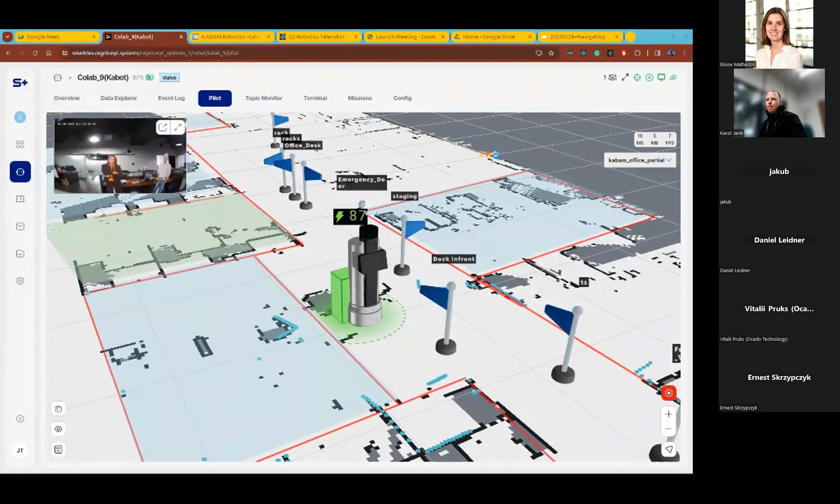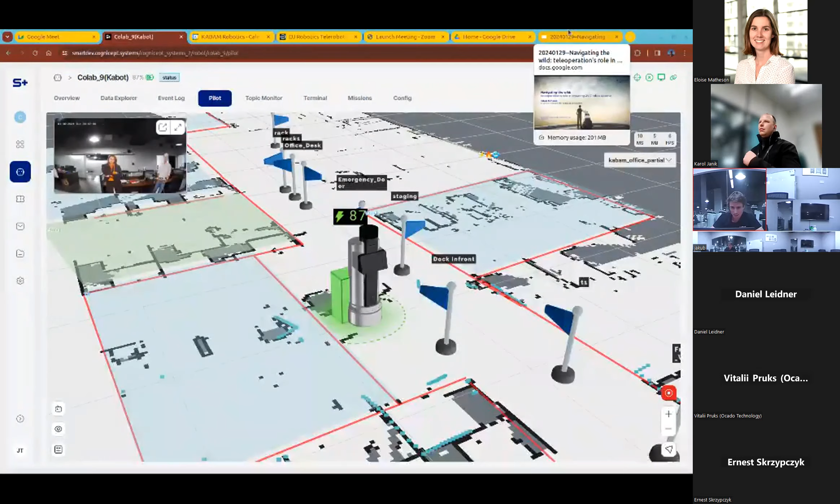Thanks, Karol, for the introduction. Actually, clarification - it's engineering director, so I'm the tech guy in the company. Expect more of a technical presentation, not a sales pitch, although there are some product slides, because I feel I need to introduce what we are building before I can get into the fun part about teleoperation and robot operations.

Sorry about the dizziness. My camera on my laptop is not working, so I'm using the conference camera. I might be rotating a bit. I still feel I should be showing my face, but let me know if you are dizzy - you can turn it off.

I also wanted to make it more fun, so there is a demo as part of this. Karol, please cut me off at 15 minutes in case I overrun or get stuck on anything not important. But as Karol introduced me, my name is Jakub. I'm the engineering director at Kabam Robotics.

Today I'm gonna talk about robot operations. I'm particularly gonna focus on teleoperation and expand on how we actually use teleoperation to keep our robots up and running.

So we are a startup based out of Singapore. We provide cloud robotic solutions, mainly tailored to the security industry, but also facility management industries.

We started building robots 3 years ago and never stopped really. If you've been in Singapore in the past 3 years, you probably interacted with our robots. We have them in some nice sites - some of you might recognize Marina Bay here, there's the airport, some of the parks. This is the Flyer.

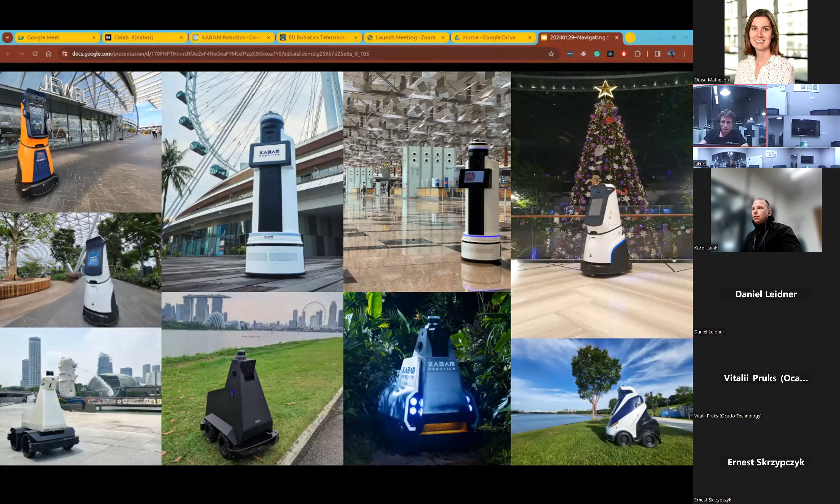Most of our robots are currently in Singapore, but in the past 6 years the team has been focusing on really expanding across the world. So now we have footprint in Australia, in Hong Kong, in Taiwan, in Japan, in the US, which is probably our next major market. And recently we delivered also in Chile.

So that's why I can quote the four continents, but still the majority of the robots are in Singapore. I think this world expansion is also creating some interesting challenges in terms of latency that I may talk about in the presentation.

To introduce a bit more of what we are building - it's both hardware, so we built our security robots, and you can see some of them behind me. Those are our Co-Labs, the indoor security robots. But we also built a cloud robot platform for robot operations and robot management.

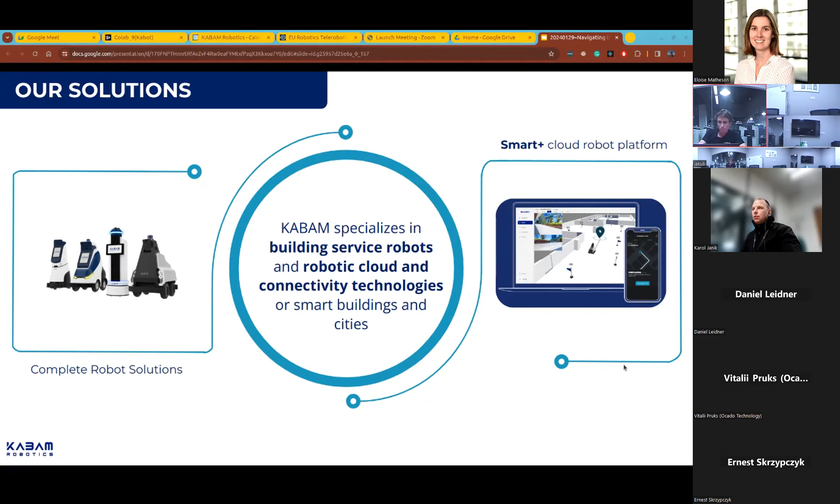I'll just briefly introduce the two robots that we are building. So this is Co-Lab, an indoor security robot for security and concierge features. Typically it would be deployed in places or facilities like shopping malls or hospitals. With that in mind, it was designed more friendly - kids like to jump on it and hug it.

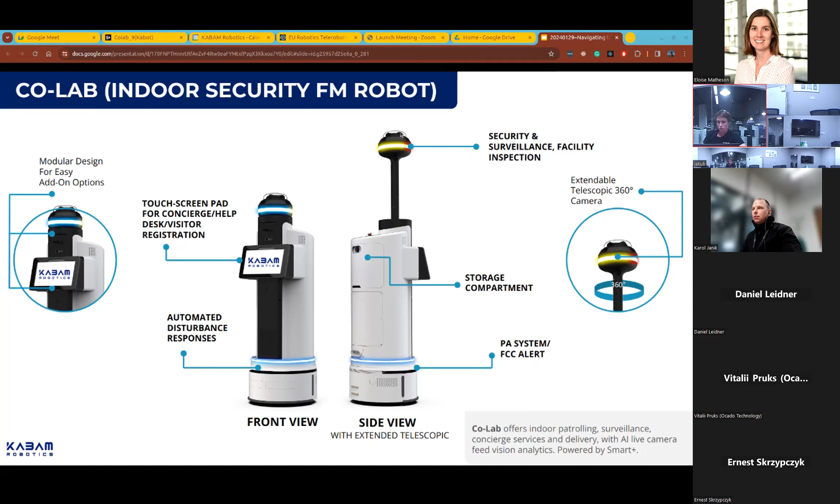We recently also launched Halo. It's our outdoor security plus patrolling robot. It's a skid steer, built to be weatherproof, particularly for Singapore. But recently we've been deploying it in places - Singapore weather is lots of rain, lots of humidity. Recently we've been exposing it also to -10, -20 degrees.

So we are trying to expand the range of where the robot can go. As compared to Co-Lab, the key idea for Halo's design was deterrence. Some of you may pick up, or I hear it often, that this looks a bit like the Tesla truck - I like to say we've been there before Tesla truck with the design. But yeah, it's more edgy and supposed to deter people.

It's deployed in public parks. It's designed to patrol around large facilities like airports, for example.

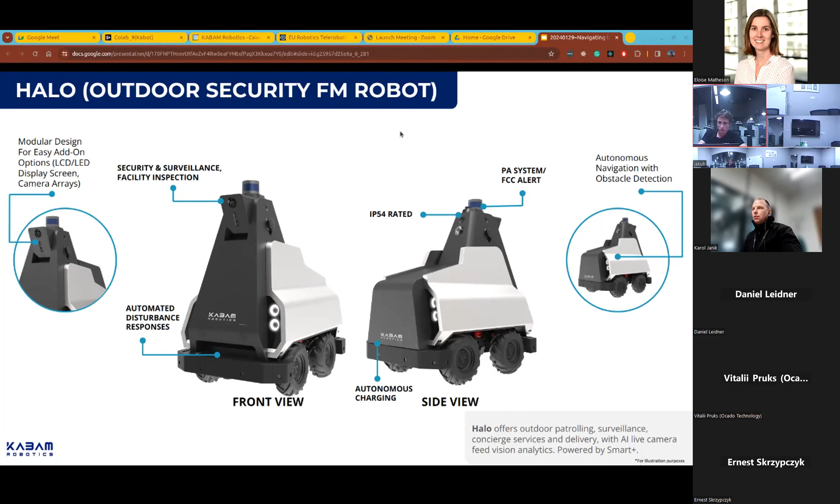And the third product that I will be focusing on the most - this is actually how we started the company. We started building Smart Plus, what at the time was Smart Plus, in 2018, 2019. We were called Cognicept Systems at the time.

And we were running operations for a company called Savioke - some of you may have heard of it. It's one of the Willow Garage companies, one of the original robotics companies. Now they are called Relay Robotics. I think we picked up a lot and learned a lot about robot operations and what needs to be done for them.

And for that, we built this platform. From the beginning, it was really focused on robot operations. It was built to be simple, for any kind of user to just jump in and intuitively use it.

So you don't need to be a trained robotics engineer. Now we also have a mobile app, so the same things you can do with the desktop interface, you can also do with the mobile app.

One of the things we didn't appreciate initially was connecting this platform into existing systems, and this is actually what's really propelling our growth now, with security customers really wanting to integrate our robots with their existing systems.

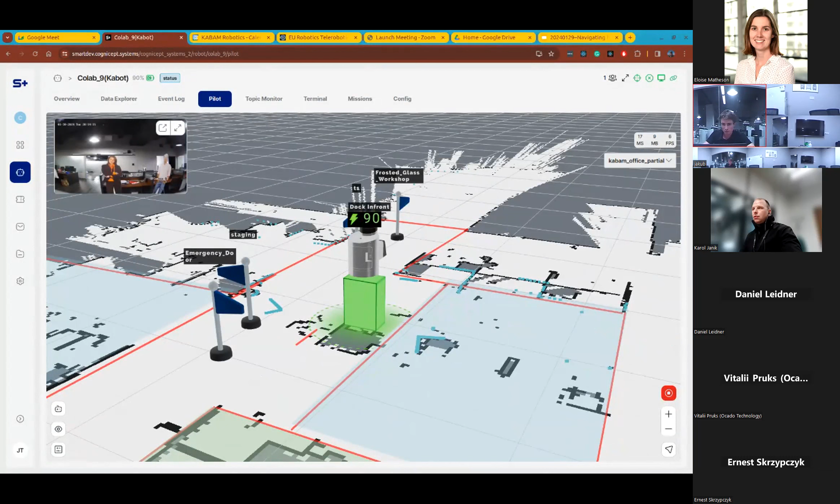If something doesn't work, I'll switch back to the video, as Murphy may not be kind to me. So you are looking at the indoor security robot. Right now I'm in the same room, but really this robot could be across the world. I'll be seeing the same thing, just probably with higher latency.

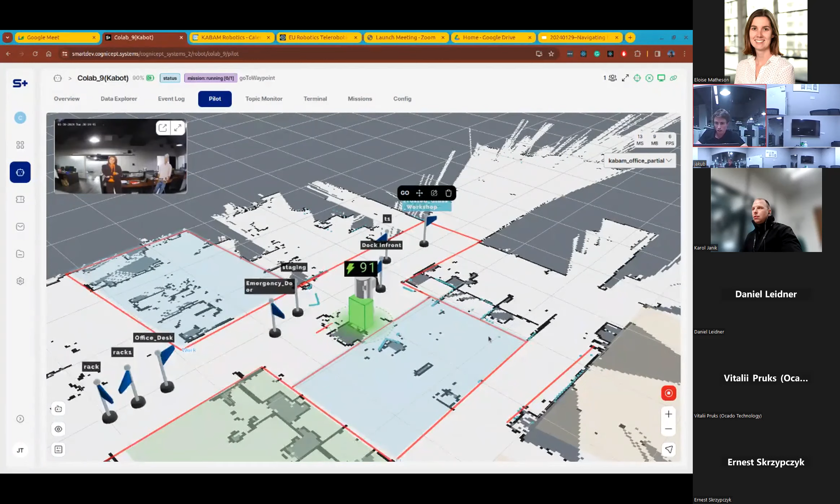I'll send the robot to look at the workshop. So here on the top left, you see the live video stream of what the robot is seeing right now. You see the path plan generated by the navigation system, the point cloud, and the LiDAR map.

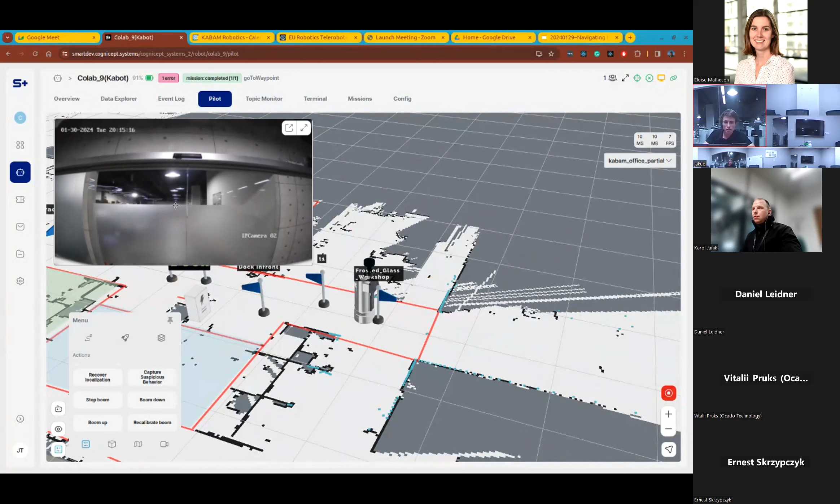As I was showing before, the robot has a boom, so from here I can just boom up. The boom is going up, so I can see what's happening in this other production area. And if I actually increase the resolution...

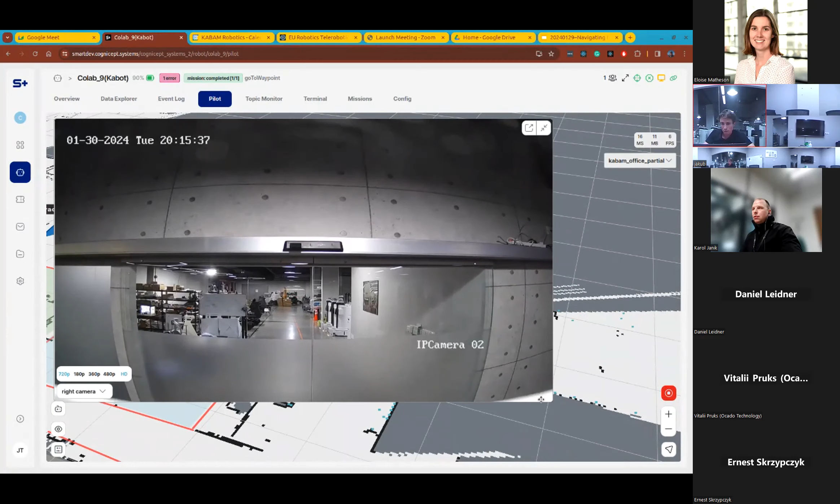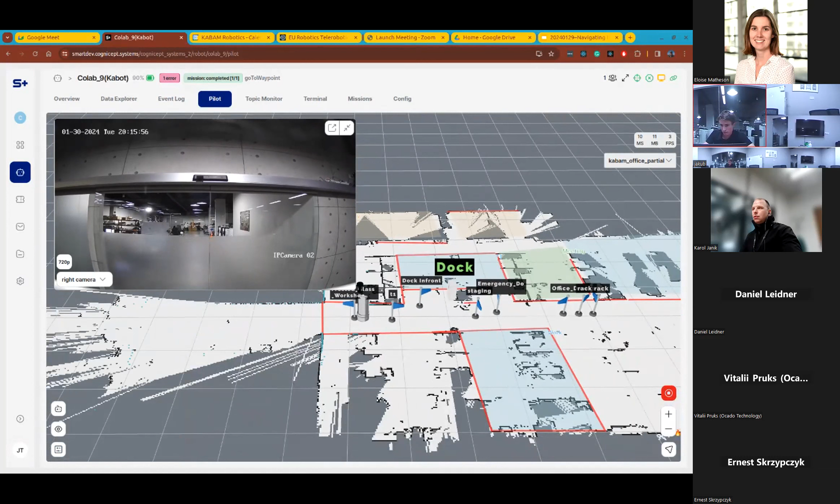So I'll try to send it across the office. Let's say here. Once the boom goes down.

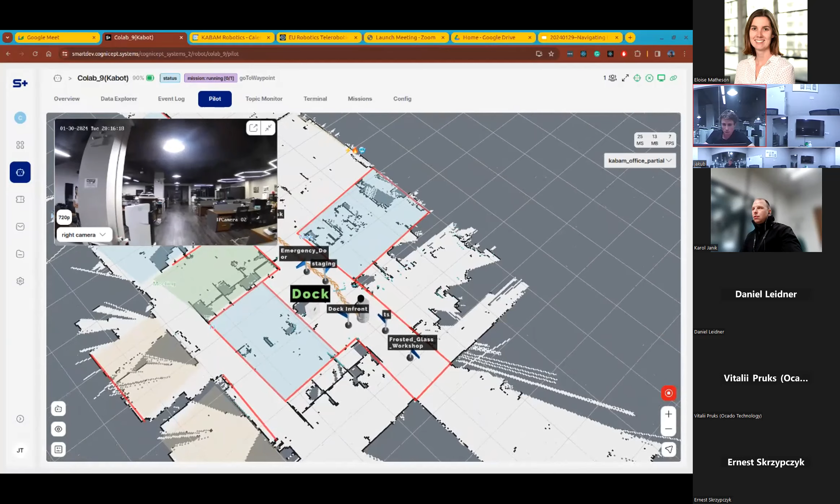So I saw that there's this cardboard box that I can see also here in the LiDAR map. So let's see if I can...

So that's the main thing I actually want to talk about: teleoperation. Let me just take over the navigation system and see whether we can push the cardboard box without doing anything too dangerous.

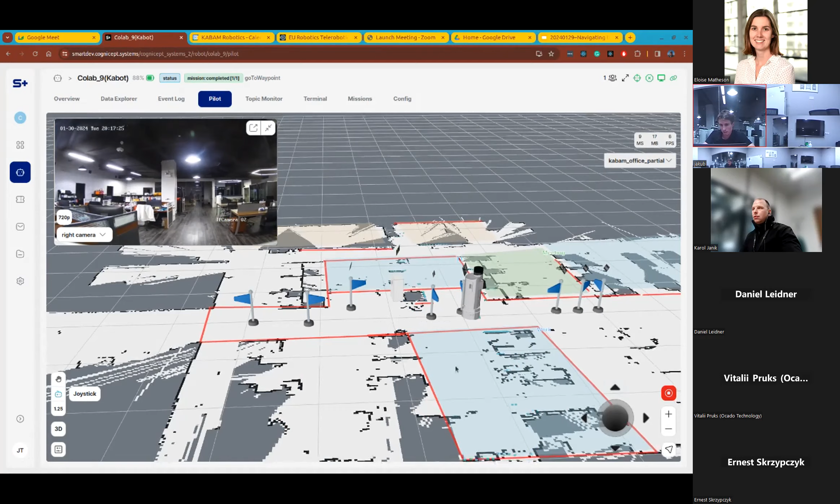I see I didn't do too good a job because the cardboard box is still there. So let's try to push it over. Okay, I think this worked.

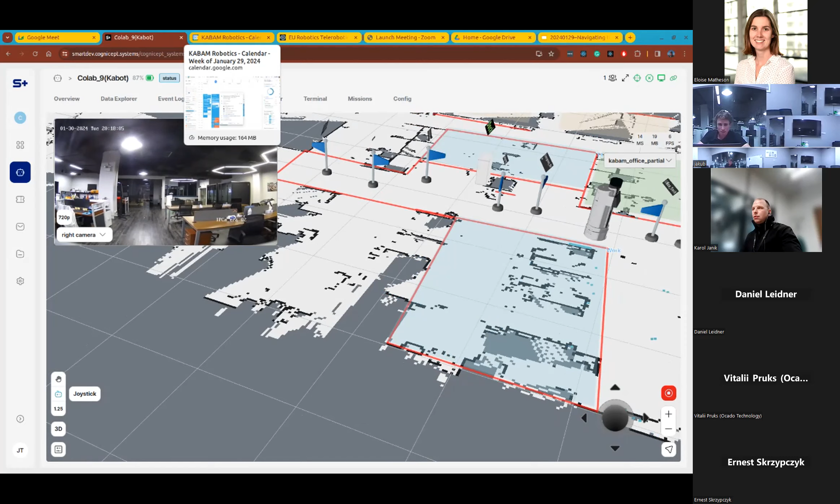Yeah, so now the robot should be free to go really anywhere. So that was a quick demo to show the teleoperation. I typically like to do this before actually diving into the deck, not at the end. Let me just go to the next slide.

In these places, literally anything can happen just because you have humans, and you have really changing conditions all the while. We solve these challenges and risks operationally. This takes a lot of humility for a robotics engineer to admit that your robots and your navigation are not perfect, but I think it was crucial for us to recognize that early on to make this a success, and maybe get ahead with deployments before your navigation system is perfect.

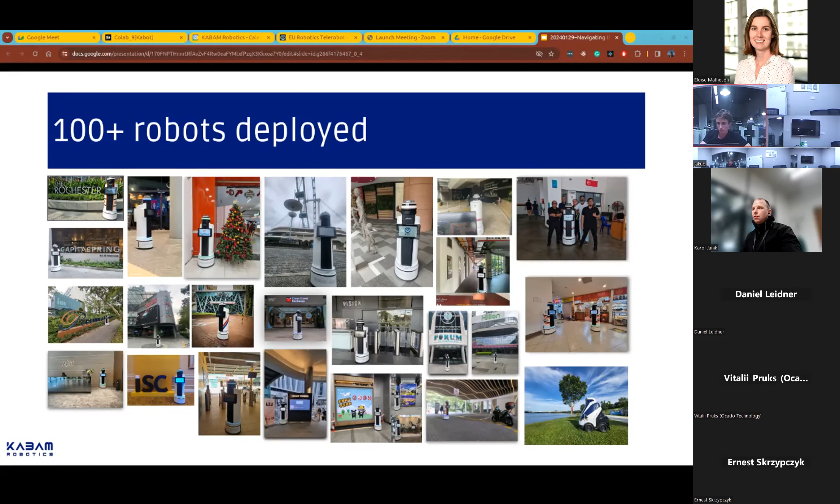Just to show you the kind of scenarios our robots need to tackle, we'll show one deployment. This is our deployment at Bedok Reservoir here in Singapore. We call this robot Oscar.

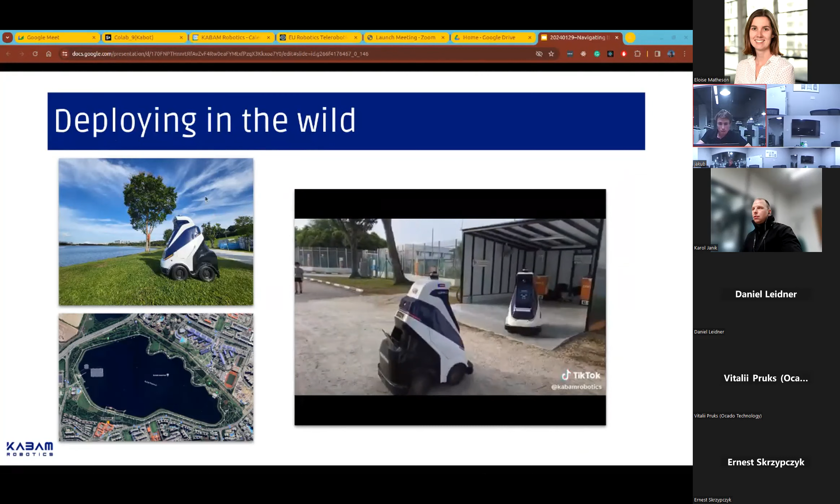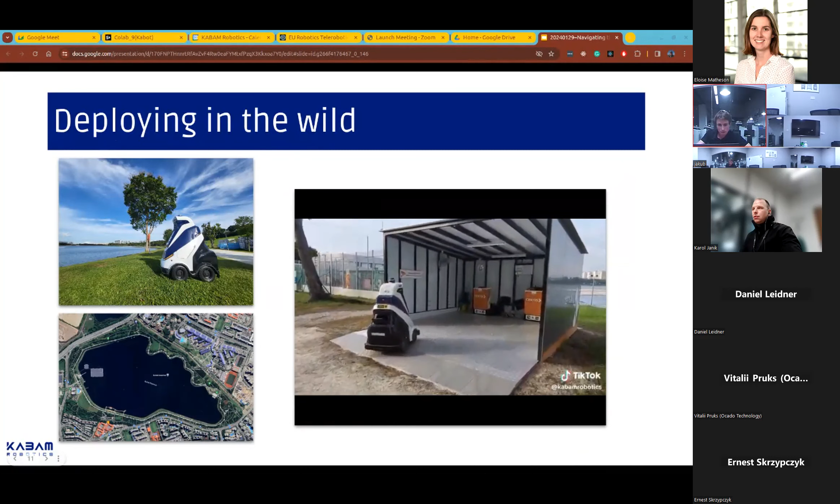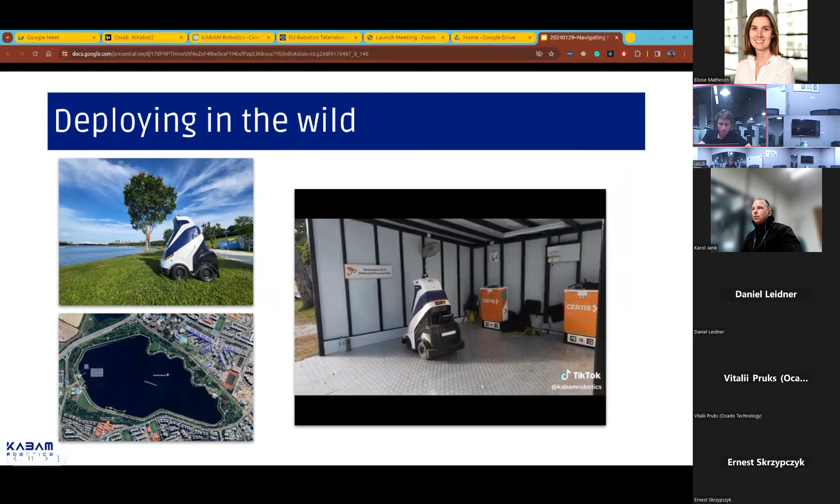We actually have 2 of them here. This is on our TikTok, where they take turns patrolling. The robots have charging stations somewhere here, and they go around this 4-kilometer perimeter to look for things like illegal smoking, illegal fishing, and people who are not supposed to be there at some spot, doing regular patrols every 2 hours instead of a human. Why instead of a human?

Well, humans don't want to walk in this kind of rain, for example, but the robot really doesn't mind, except that sometimes this may pose challenges for the navigation, and we might really encounter some strange edge cases. Normally this environment is really simple, and your navigation system should tackle it easily.

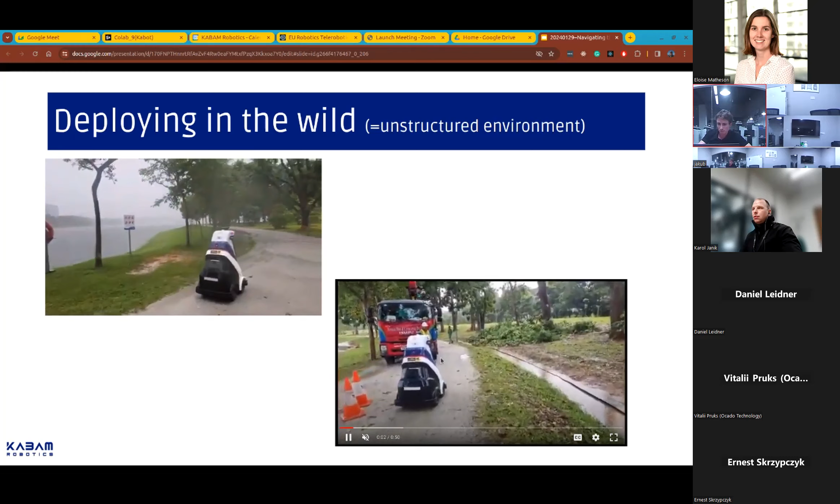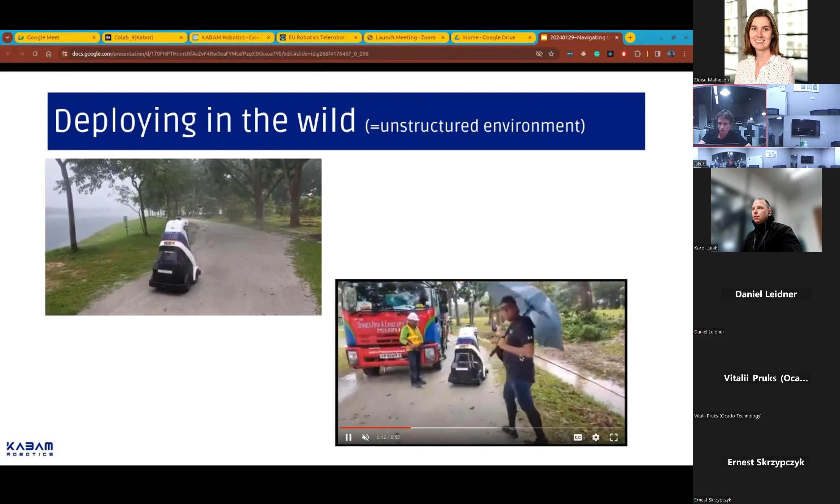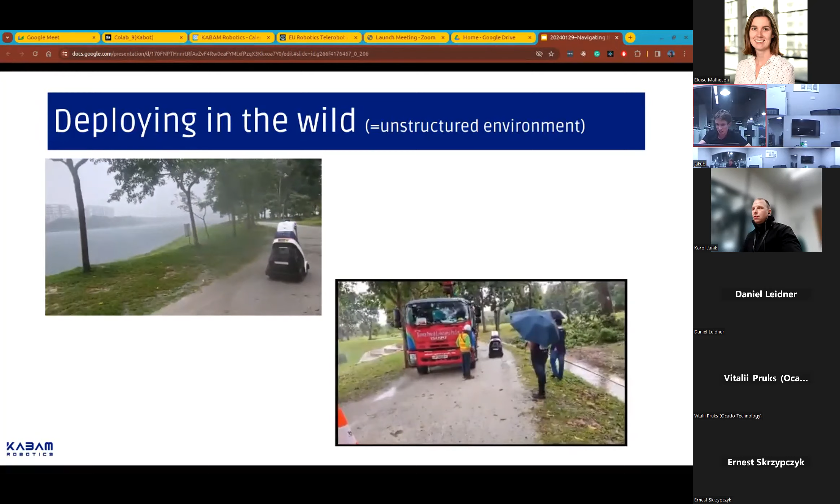But what if there's a situation like this, where there are folks cutting trees, there is rain, there is a ditch full of water on your right side. This is just an example of an edge case that's actually autonomous. People are recording this video because they were surprised the system was able to handle this autonomously.

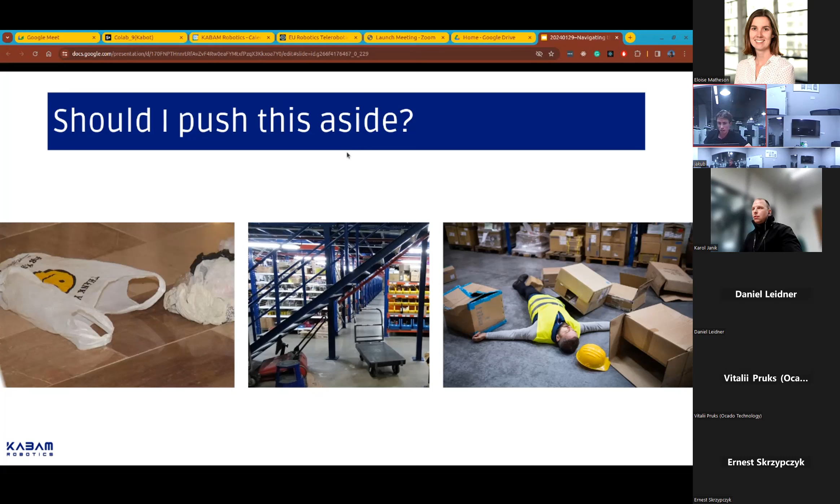Another example from our CEO, he likes to use this one in his deck because he's coming from the commerce space, from warehouses. At what point can the navigation system or the autonomous system decide: should I push this aside, should I run over? So that's what I was trying to show during the demo.

Robot operations is something that took me a while to get on, but once you start running a business, you realize every on-site intervention is very costly. Do you really want to drive 3 hours, which is our average drive in Australia to the sites we deploy, just because of a plastic bag?

For autonomy, really the time to issue resolution is imperative, because that equals robot uptime, and that's what the customers are paying for. So where we use teleop right now, that's all robot operations.

First, during deployment, when we do mapping for the navigation system, since our robots use LiDAR-based navigation, we teleoperate the robot to create the map. Then through the same system, instead of being on-site in the heat or the wind, we can remotely set out waypoints, no-go zones, and update the map just by pushing the robot around with teleoperation.

Second phase, after the initial deployment, where engineers would typically be on site, we have a stabilization phase, where we see lots of issues initially during deployment, and those are fixed. But we still need to somehow help the robot navigate those situations, so things like remapping happen a lot in the stabilization phase—again using teleoperation instead of autonomy.

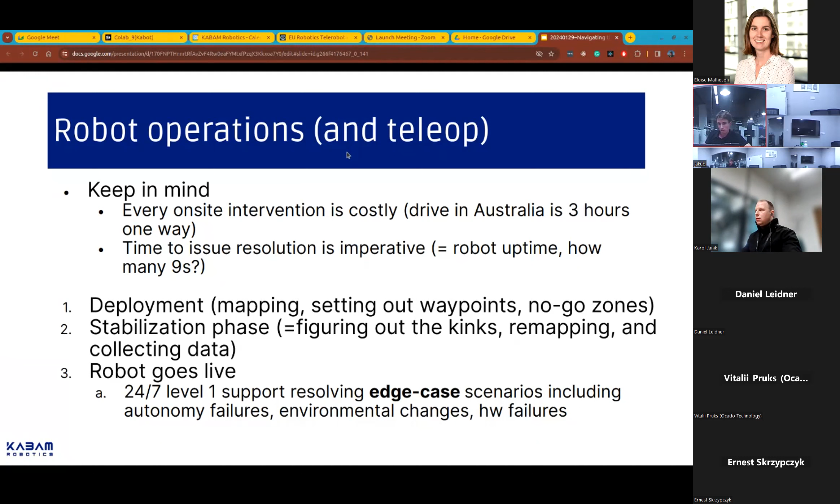And of course, collecting data to improve the navigation system. Then after the robot goes live, we have 24/7 level 1 support that handles these edge cases, autonomy failures, environmental changes, or even hardware failures—if your wheel, if your axle breaks, can your navigation system handle that situation nicely? Meanwhile, a human can probably deal with that kind of situation.

And I know I'm running behind, but what I think was important to realize from the beginning, when we started Cognicept Systems, was how to get teleop scaling, because we cannot have one operator handle one robot. That's of course not scalable.

So I think there were two recognitions in the beginning. One was to build a scalable solution, which for us is a web application. It could be something else, accessible from anywhere—our operators are in India, Singapore, US, and by anyone. So the interface is very simple, very easy to use, easy to train. Training has been a big factor for us, and of course that adds on top of the cost of the robot if the robot is complicated to use.

We also introduced automated incident management, so that one operator can handle multiple robots without having to monitor each robot and what it's doing. It's basically kind of a call center for a robot, which is a bit ironic, where the robot realizes, oh, something is wrong with me. That's our error classification stack, which is, by the way, open source.

You guys can find it—maybe I'll be sharing this deck later. That creates an incident ticket alert for an operator, and then the operator can intervene and handle the situation, or call someone on site to help the robot resolve the situation.

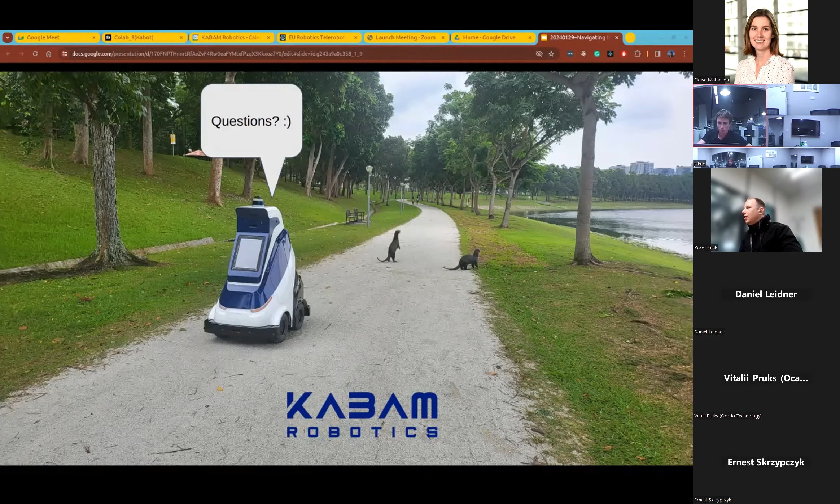So which technique of GPS SLAM harmonizing does your solution use?

Which GPS? I don't understand the term harmonizing, but if you are referring to fusion of the GPS and SLAM, that's probably something I cannot share here in terms of the details on the navigation system, unfortunately.

There's another question from Etienne. Have you implemented your own navigation software, or do you use open source navigation solutions?

It really depends on the platform. So the outdoor navigation is something we are building ourselves, but for example, the indoor navigation is something vendor-based, proprietary, not ROS-based. For the outdoor navigation, we are reusing a lot of open source.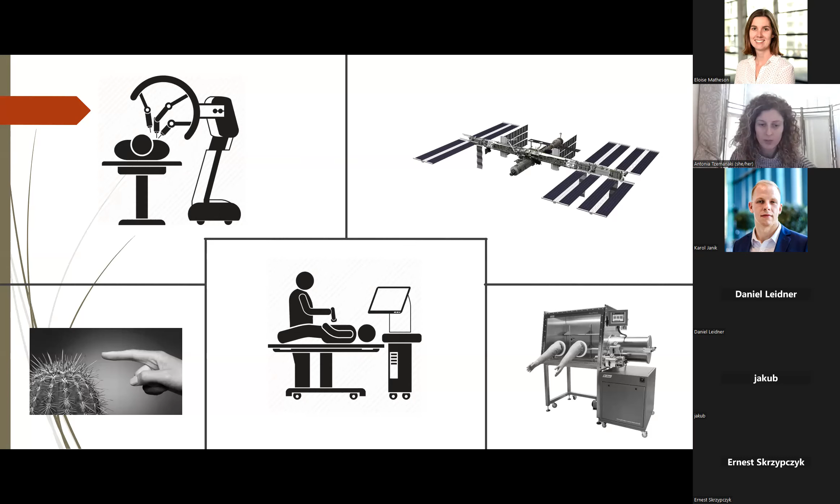And we know this, of course, from our everyday life, since we were babies - playing, touching each other, feeling each other, communicating with our environment, in really high precision activities like surgery, playing the piano, or cooking as well. So I just want to show you a high level overview of some of our projects, starting with some of our surgical projects.

So this is back in 2016, actually quite an old project, but it's a bit of the basis of how we've started developing different things. This was aimed at minimally invasive surgery, and we wanted to revolutionize how minimally invasive surgery is done without needing to use the Da Vinci console and joystick manipulation.

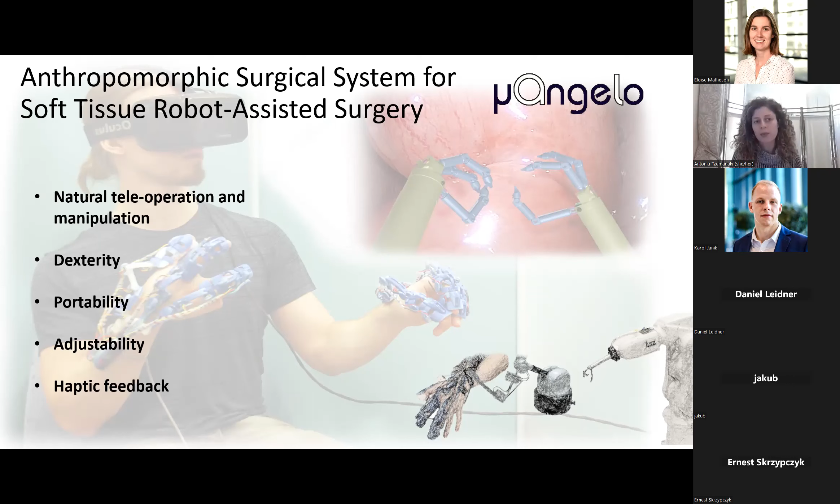We wanted to have a direct, natural teleoperation using your hands as a surgeon, to try to minimize the training time needed on the system, to make it more ergonomic, and generally adapt the system to your hand, not your hand to the system.

So this basically included a hand exoskeleton that can track your hand and all the joints and how it's moving, and then transfer that to a little surgical instrument, of which we had a prototype here. On the left, you can see a 3-finger miniature hand, or instrument, with as many joints as your human hand, so it can behave in the same way.

So you can see the concept in the simulation of how it enters the abdominal cavity, deploys itself, opens, and then is teleoperated directly by the surgeon's hand.

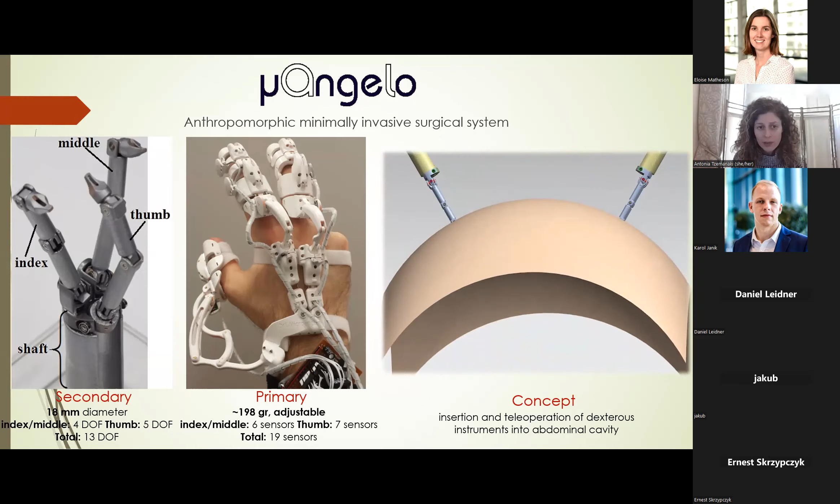We are also now working on soft versions of them without 3D printing, just using soft materials - either fabric, leather, or even silicone - that we can laser cut and make custom made for your hand directly, because all of us have different hand sizes.

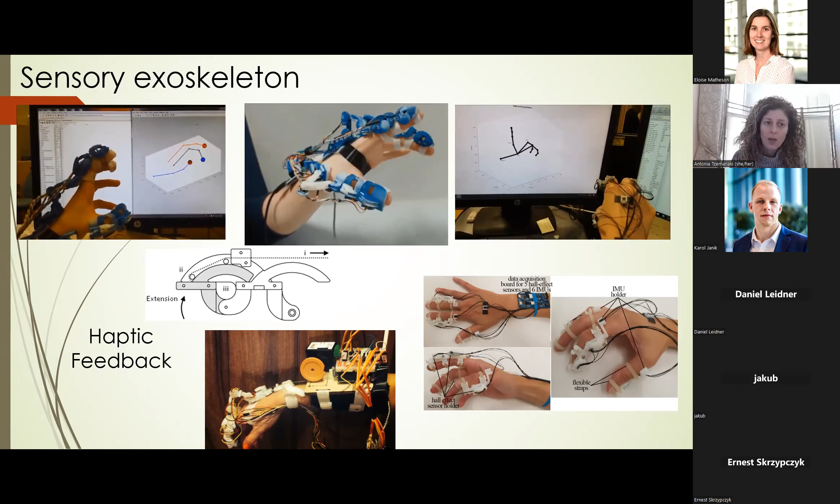So more on the tactile and haptic side of things - this is where we started in 2018, actually. We made this little device, we call it a fingertip haptic device, and it was all about having this little inflatable pillow touching your fingertip, inflating, deflating, simulating different stiffness, and also squeezing your fingertip or releasing it.

With these two modalities, we were able to simulate different hardness of possible nodules when palpating a body, to try, in a teleoperated way, to diagnose someone if they have a lump on their breast or other parts of their body. But of course this has applications in many more areas than just diagnosis.

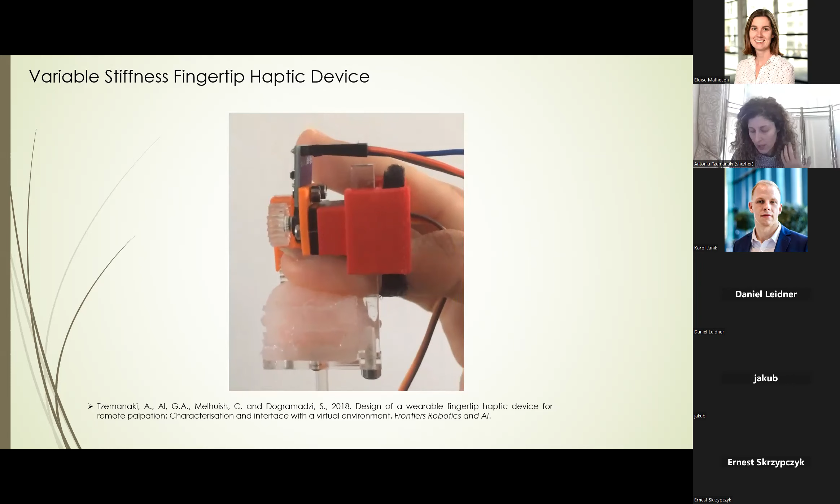But we took it a little further, and said okay, this inflation and deflation gives us the possibility of tuning the sensitivity of that device. So here we took it to make it a tactile sensor.

You might have heard of a sensor called TacTip that's been around for probably more than a decade, coming originally from the Bristol Robotics lab. It's basically an elastomeric membrane that you can see here. You print it like this, and then you flip it inside out. Then you can put a camera to monitor those dots and see how they deform when the outside of the membrane touches an object.

So we took that a little bit further by making it pneumatic. We added basically a camera and also an area that is filled with air, so you can inflate and deflate it. By doing that, we were able to tune its range and sensitivity.

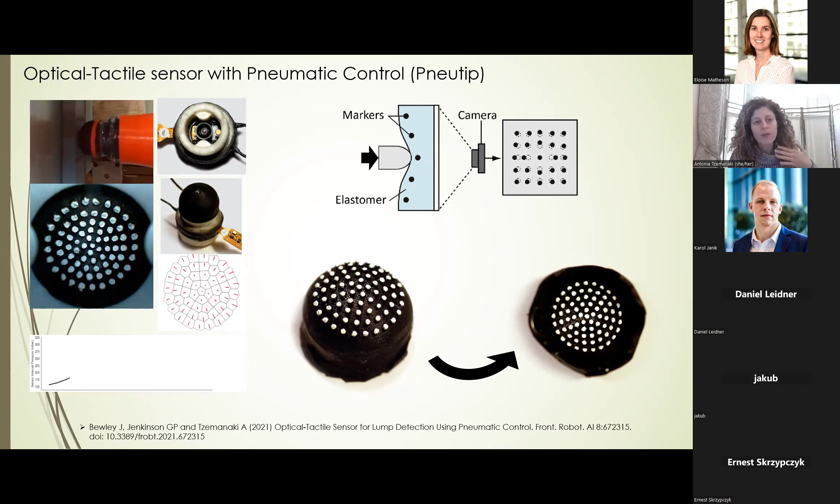So when you want to sense something that is beneath the surface by a lot, like 30 millimeters, you can inflate it, make the membrane more stiff, and therefore have the capacity to measure something with higher forces deeper. If you want to measure something on the surface of the object, you don't have to have it very inflated. You can have a softer membrane, meaning you have a smaller range of what you're sensing, but with higher sensitivity. Instead of having it visual like this, where the camera has to be inside the sensor, we took it a step further.

So we removed the camera from inside the sensor so we can miniaturize it as small as we can. Here you can see it in the size of a fingertip. But we were able to further miniaturize it by a tenth of that, which is basically 5 millimeter diameter. I'm not actually showing this in the slide.

The way this works is that it has all these channels, you can see here. We fill them with water that we dye black. Then we can basically move the camera off the sensor onto a different table, and the camera monitors the water moving up and down in these tubes. By doing some thresholding and computer vision techniques, we are able to understand if an object is there, and what is the diameter and geometry of the object.

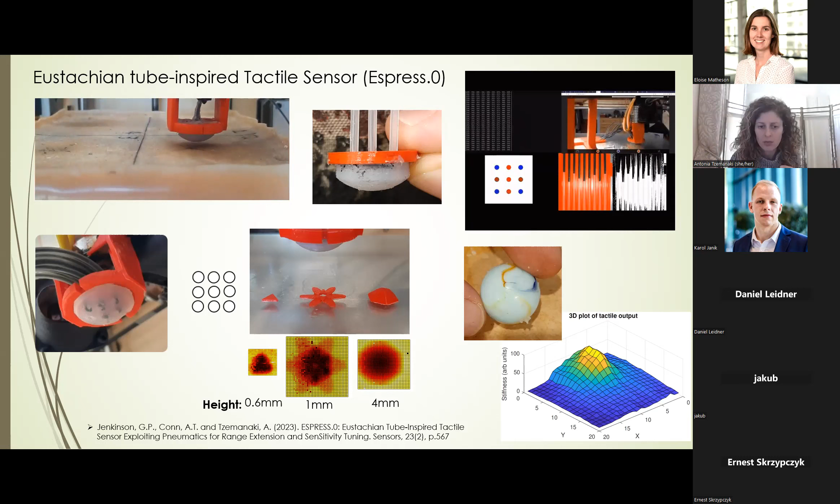And also we can do this because it is, again, pneumatically actuated, this sensor. We can also look at different depths, and we've been able to map a tissue that had nodules embedded in it at a depth of 20 millimeters, which to our knowledge is probably the deepest that has been done in the literature so far. So how does it relate to dexterity, manipulation, and teleoperation?

Really it's because we want to attach it to grippers. Here you can see one of our bio-inspired, biomimetic grippers that we developed. We named it Lotus because it takes inspiration from the lotus flower, how it opens up and closes, and also how compliant its petals are. Again, we looked at applying this to breast diagnosis or examination, but essentially it's a gripper, and it can be used with these sensitive tactile sensors at its fingertip for any teleoperation task.

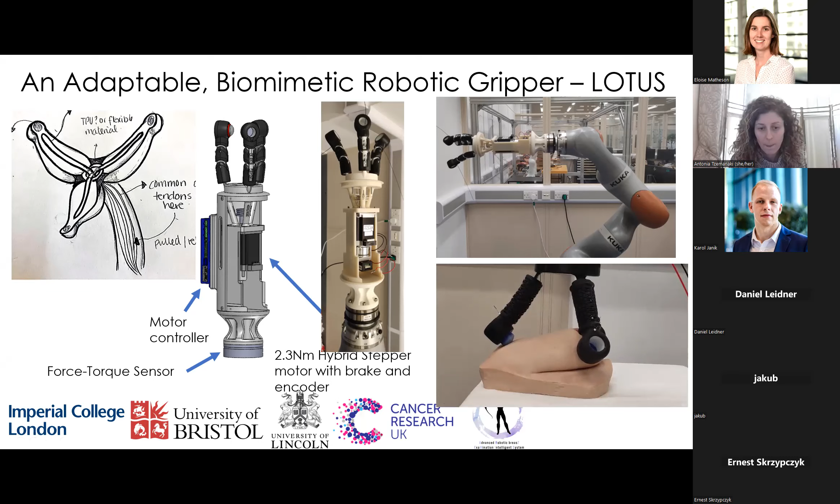We also tried a different type of mechanism, which we call Iris, because it mimics how the iris of a camera opens and closes. It's a very simple mechanism, only 2 degrees of freedom, but the symmetry and the compliance it has make it able to grasp and manipulate different objects that are asymmetric and of different sizes. It's also parametric, so you can make this mechanism with as little as 3 fingers up to 7 fingers. Here you can see a version of it with 5.

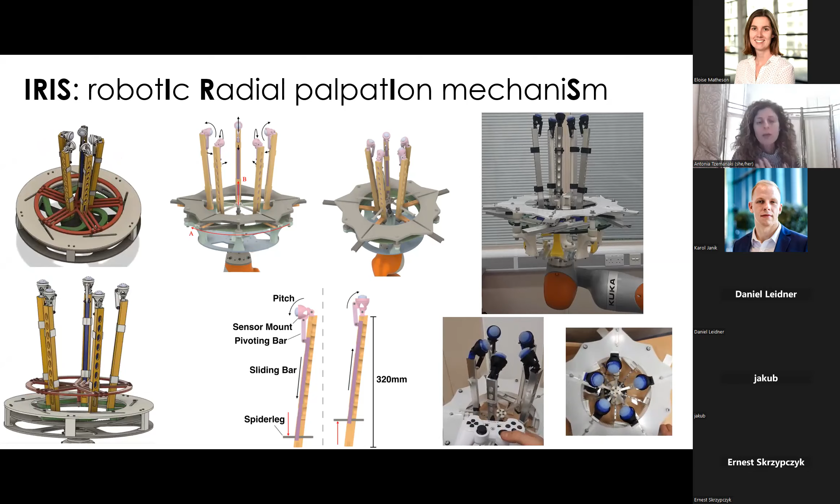So I did mention that the title of my talk would be bringing the end user into the research and having the end user in mind. All of these developments, specifically for breast health and breast examination, were done with a series of focus groups with panels. We invite participants, the end users of our devices, to come and see what we're doing and give us feedback. We do that regularly every 3 months in our projects. Based on the feedback we have another cycle of research, printing, and testing, and then we show them again. We've done this over about 18 months, 4 different times.

And we have been reporting results, and based on that, we have developed. Interestingly, we always give them different samples to touch and feel, see what they like, and they tell us they like this because it looks more organic, it looks soft, it looks safer. But in the end, the user really cares about the functionality and the accuracy, and how well that would compare to a human doing it. So this is a major takeaway here.

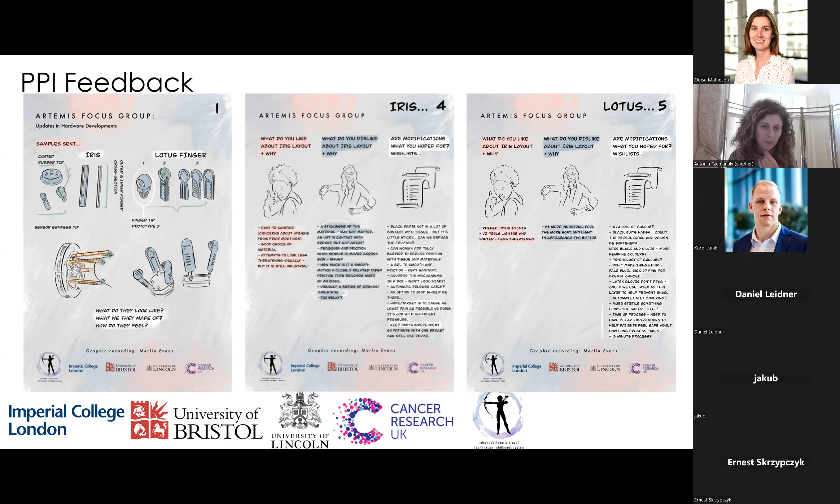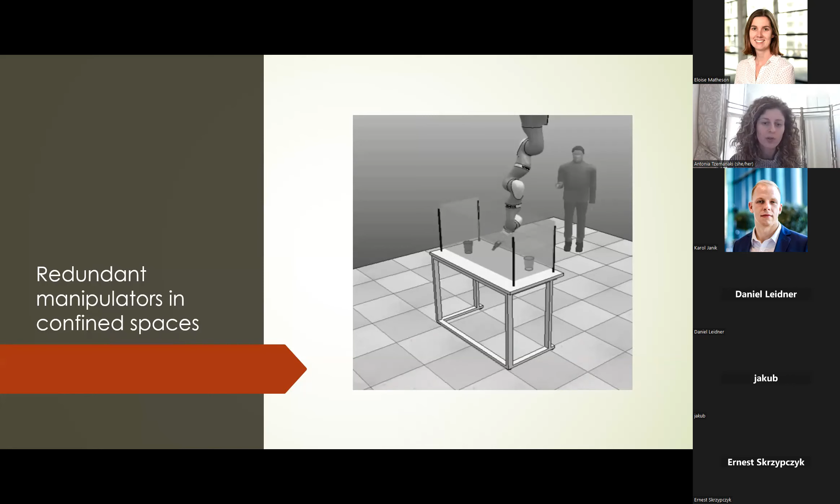Moving on a little bit to the extreme environment. We have been looking at nuclear and space, specifically for glove box teleoperations. This was work of my student Kat Stiles, and it was all about optimizing the path planning of redundant robots. In her case, she used a KUKA iiwa with a 7 degree of freedom robot, and also attached a gripper to its end. It was all about creating this huge database that should be able to simplify path planning and make it work in real time.

She produced a database that had 1 billion configurations that the robot could then quickly scroll and pick from to go from an initial position to a target position without conflicting with its glove box, which was basically the constrained environment. You can see here a complicated path, having no collisions either with itself or with the glove box, which you can't see now, but it takes the limits of its walls into consideration.

So we are looking also at human-robot interaction, especially its trustworthiness. And the application here is in space, especially when we have high latency. This is work mainly with my brilliant PhD student, Joe Lucas, and also with Thales Space UK. We have been looking at how haptic feedback can be beneficial in high latency operations.

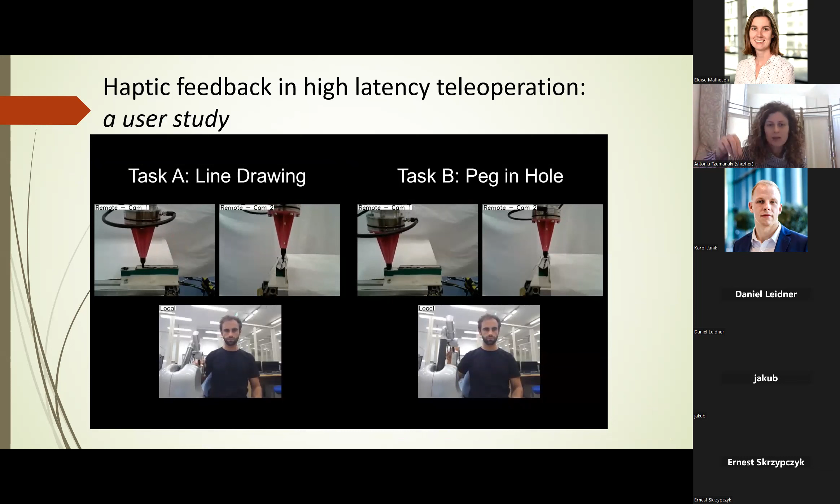This is where we started, and the results actually were a little bit unexpected. It was really interesting because we were expecting haptic feedback would solve everything, would mitigate all the problems we have. But we started with this little user study here. We had different tasks, basically draw a line with the robot and then place an item in a hole, and do that with haptic feedback, without haptic feedback, or with both visual and haptic feedback, and see how it helps.

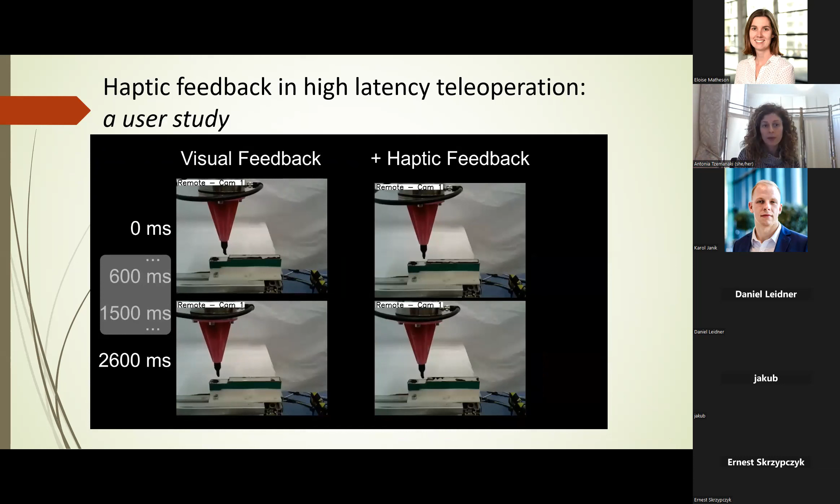What was really interesting is that we saw haptic feedback actually improved the results up to a point of latency, and after that it made it so much worse, which was not exactly what we expected when we started this study, but it was a really, really useful result.

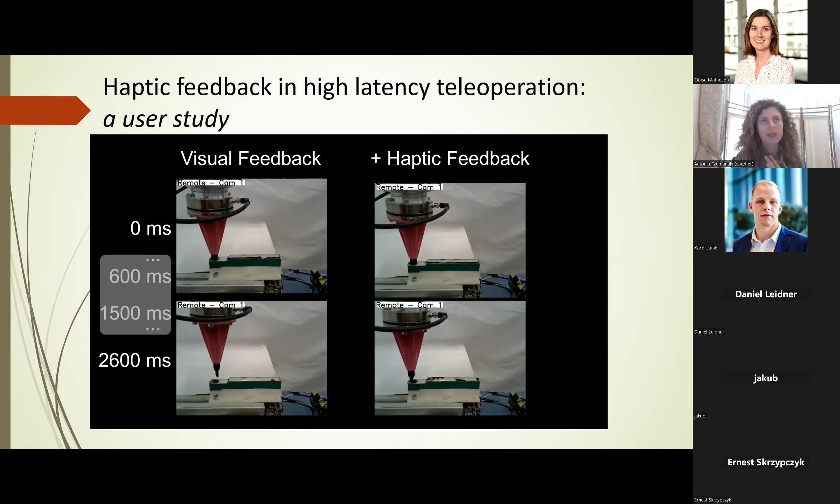It was all about basically the miscommunication: the user thought they were at a specific point, then were trying to do something, and suddenly the system was at a completely different point, and it was basically kicking against what it was doing. This is actually now in print, I believe, probably out in a few weeks, this study.

But basically, this all made us start thinking we really need to go down to the end user, we really need to see what it is that they're experiencing. So again, the end user in mind. We actually conducted 12 interviews for 3 different application areas: underwater, explosive ordnance disposal, and nuclear. We also included surgeons because, again, they're using very similar techniques, not the same systems, but teleoperation.

So we focused on high level requirements of what the priorities are, medium priority, and then also the ones they will not have. I'm not going to go through all of this, but just a few interesting ones: they don't really like VR headsets, which was really interesting. They don't like it when a system is controlled by a virtual representation, and the system must be capable of changing the end effector tool automatically.

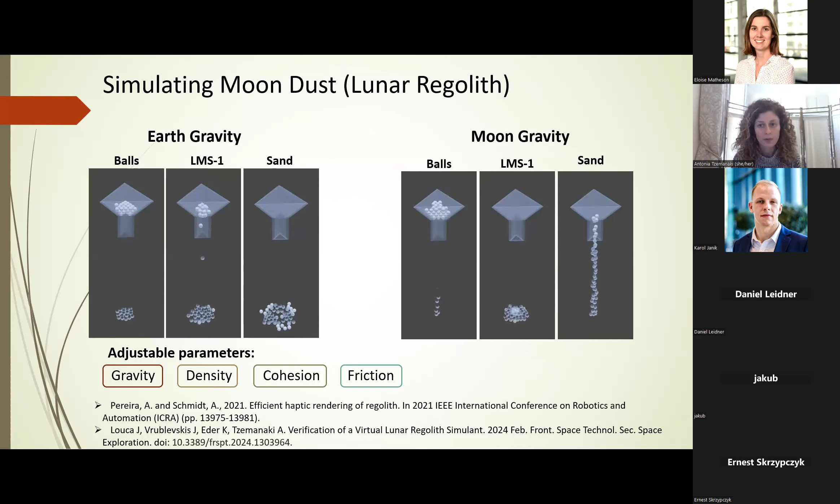So you can see here how the LMS1, which is the simulant for lunar regolith and sand, and then macroparticles are falling through funnels in Earth and Moon gravity. We tried to extend the model, make it more scalable, and looked at experimental verification of it in the lab in the form of funnels, where we changed the diameter of the funnels.

We also looked at different diameters of the particles, so we used ball bearings, sand, and the simulant in the lab. The main advantage of this model over other virtual representations in the literature was that it is lightweight enough to run in real time. That was the goal, to make it simple to run in real time.

It's good enough for most cases, though it doesn't scale perfectly for the different angles of repose, and doesn't work very well when the macroparticles were blocked in the funnels. But depending on what your requirements are, you can use this, or use a more computationally heavy model that exists in the literature.

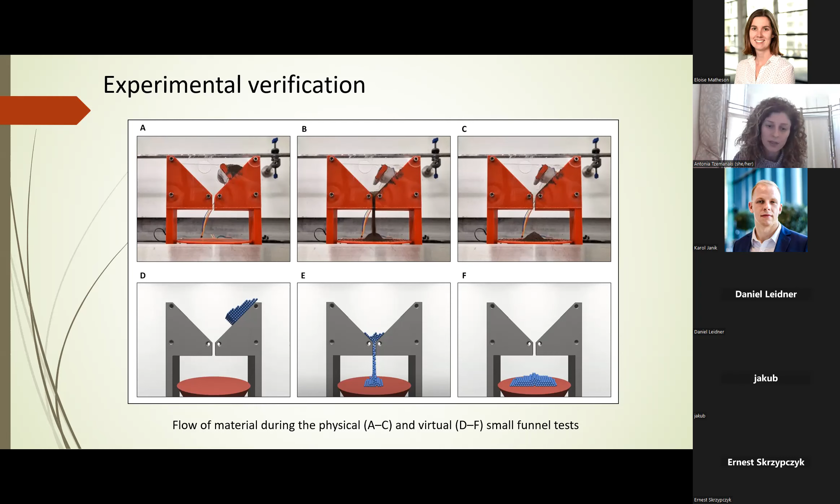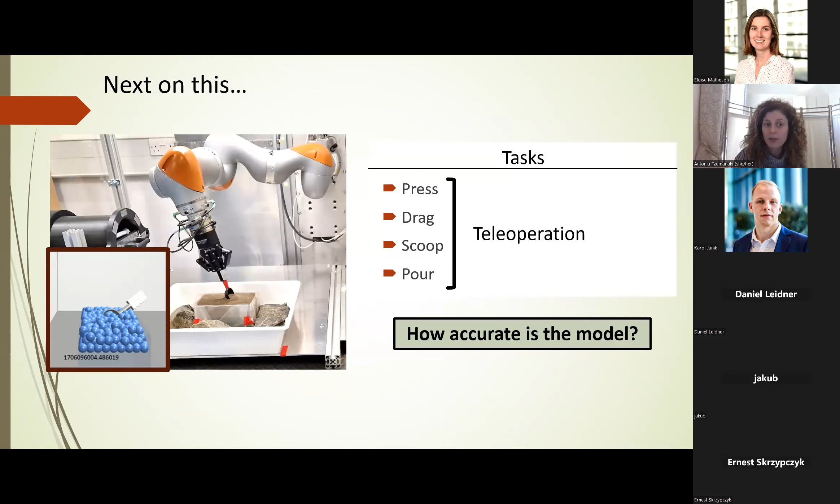Next is looking at how accurate the model is when we're looking at more high-level teleoperation tasks, for example pressing down, dragging the end effector through the regolith, or scooping it and pouring it. So I think that was my last slide. Thank you very much.